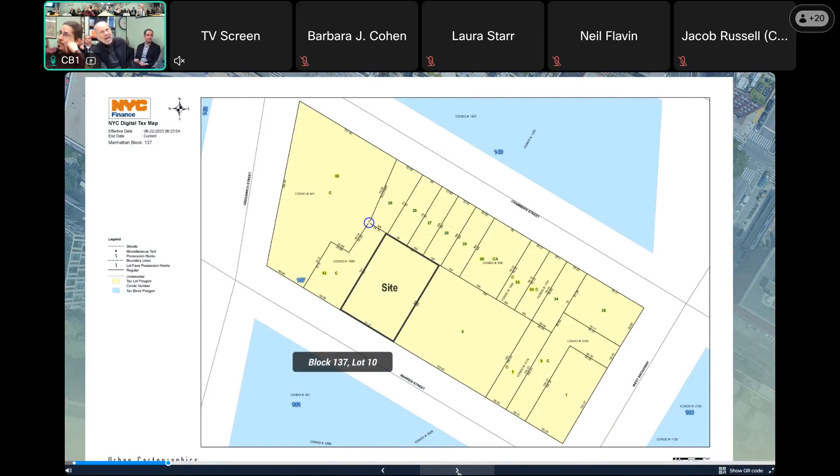The purpose of this presentation is to explain how we got here, the exact conditions that gave rise to practical difficulty in developing the site, and why they could not be foreseen nor avoided, and how a small enlargement to the building's 12th floor, which is the subject of this variance application, is the minimum needed for the hotel to succeed.

Danny, could you turn the volume?

The story begins back in 2019 when the hotel's current owner, Firmdale, began planning the new hotel. The design they and their architects came up with, which was subsequently approved by the Department of Buildings, included a total of 4 cellar levels beneath the building.

These lower floors were intended for mechanical systems, back-of-house functions, and several amenity spaces, such as a fitness center and meeting and function rooms. None of these is superfluous. Indeed, having these amenities is virtually standard among hotels, regardless of scale or brand. The 4 cellar levels comfortably accommodated these essential elements, reserving above-grade space for a lobby, restaurant, and mainly the hotel's guest rooms and residential units.

Soon after excavation began in 2019, the project encountered unusual practical difficulties. The soil and groundwater conditions at 86 Warren were far more unstable than geotechnical investigations suggested, requiring extensive dewatering just to maintain safe excavation. As the application team can explain, the subsurface conditions could not have been predicted with the tools and testing permitted before construction.

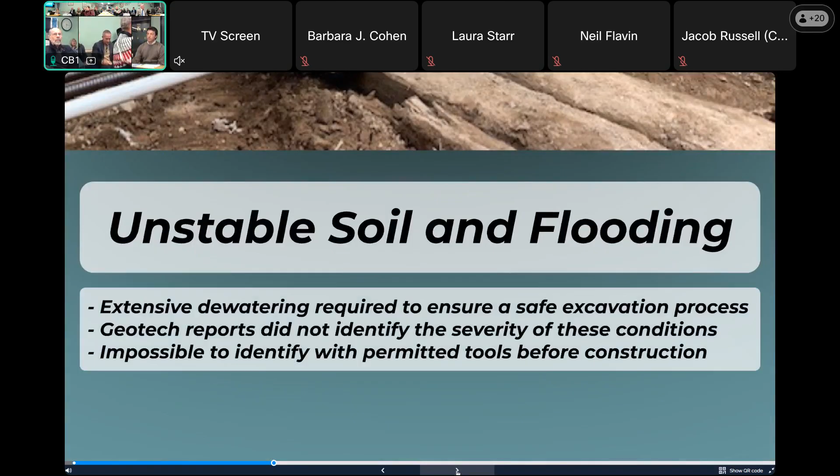The unique soil conditions immediately interacted with an unexpected condition in the adjacent building at 80 Warren Street, which was constructed in 1915. That building's foundation wall, which was assumed to be tied into its floor structure above, was in fact floating, meaning it was not connected to the building. This critical structural flaw, which was impossible to know about ahead of time, made the neighboring building begin to move as drilling for the hotel's secant pile wall foundation began.

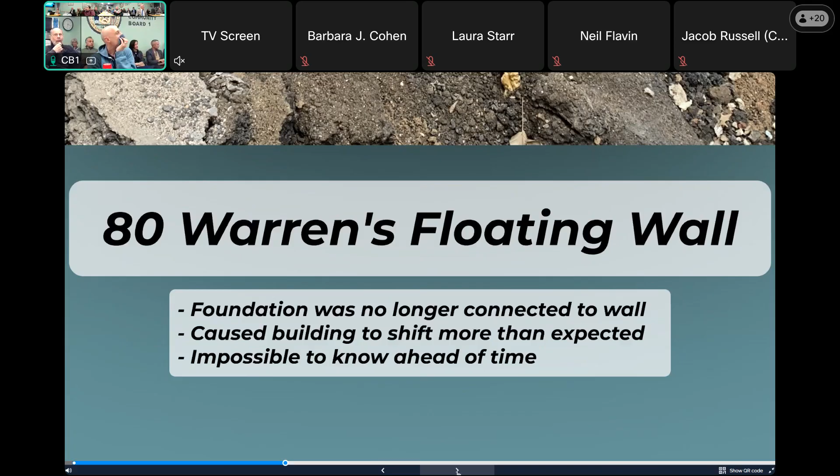For that reason, all manner of precautions were taken, from installing strapping to continuously monitoring the movement of the adjoining building. As drilling and excavation proceeded, this combination of unique soil instability and the unforeseen condition of the adjacent building continued to cause movement in the structure of 80 Warren Street, far exceeding what would be expected in a typical excavation.

Once movement in the neighboring building was detected, the construction at 86 Warren Street was stopped, the cause of the problem investigated, and extensive steps to stabilize nearby buildings completed. These actions were taken out of an abundance of caution, often when the damage being repaired might not have been due to the excavation of the site at all.

In fact, over the course of construction, the team performed nearly $500,000 of repairs to 3 surrounding buildings. At 80 Warren Street, they repaired foundation holes and cracks, installed new tie-ins between the wall and floors on all 6 levels, and completed substantial interior repairs totaling well over $330,000.

At 92 Warren Street, they waterproofed the entire interior wall adjoining the site and repaired terrace finishes, approximately $42,000. At 160 Chambers Street, they repointed the entire rear facade, repaired windowsills, recaulked windows, and installed structural wall straps on every floor, approximately $115,000.

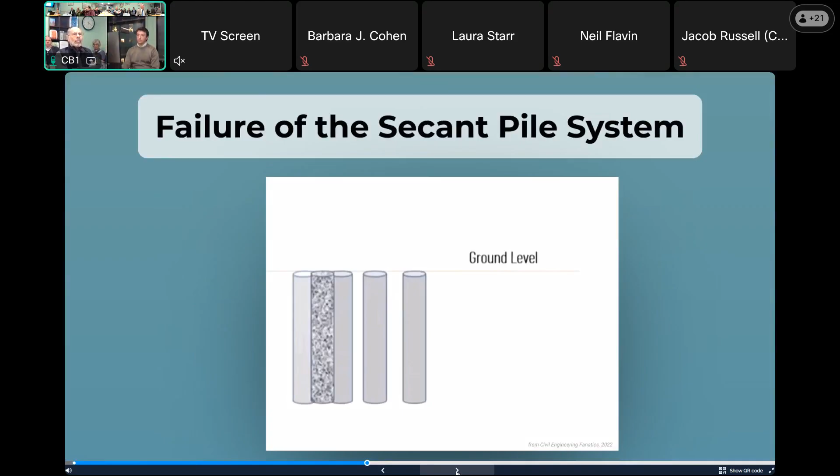To control the unstable soil and protect surrounding buildings as the hotel's several subcellars were being excavated, the project's engineers designed a secant pile system. So, with only about half the secant pile wall completed, the project team made the difficult decision to stop further pile drilling and redesign the building to have just one cellar level.

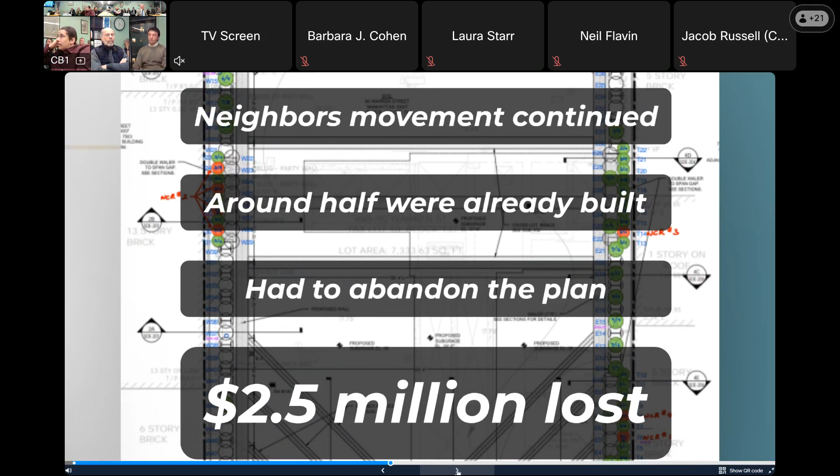At that point, the hotel had already invested over $2.5 million in secant piles that were ultimately abandoned in the ground. Abandoning a foundation system of this scale is extraordinarily rare, and it underscores the uniquely unstable subsurface conditions and the degree to which the site's physical characteristics directly impacted the development of the site. Perhaps more importantly, once they concluded that the secant wall could not be completed, the team was forced to revert to a conventional foundation system.

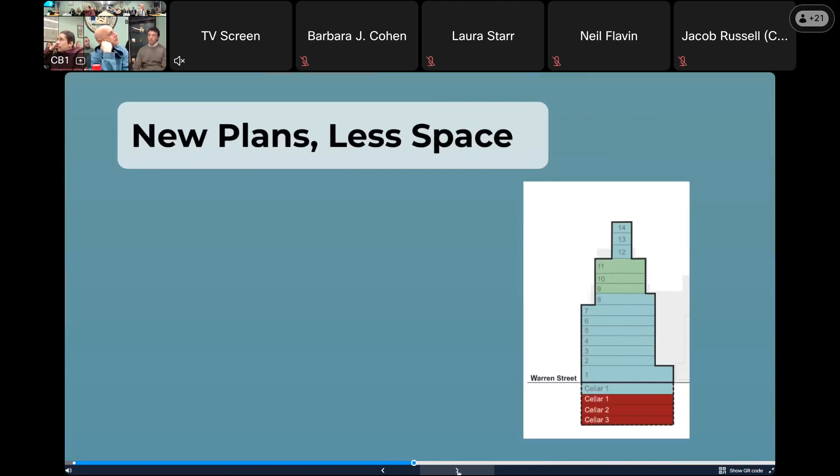Cellar is now filled entirely with mechanical and back-of-house functions, leaving no room for the basic amenities and operational spaces that were originally planned for the 3 subcellar levels. This loss was the direct result of the site's unique physical conditions, unstable soil, challenging groundwater behavior, and the hidden structural condition of the adjacent building, and was in no way self-created.

While these physical issues were unfolding, 2 compounding factors made the situation even worse. First, just as the team encountered all of the problems related to excavating the site, the COVID-19 shutdown halted all non-essential construction, leaving a partially complete foundation and a gaping hole in the ground. Not long after, the city announced new rules requiring a special permit for hotels not already under construction with completed foundations.

Leaving the site unbuilt and seeking a variance at that point would have exposed the neighboring buildings to prolonged risk and could have jeopardized the project's zoning status. While these compounding factors do not form the basis of the variance, they help explain why, in the face of unique and unpredictable site conditions, the building was completed before this application was filed.

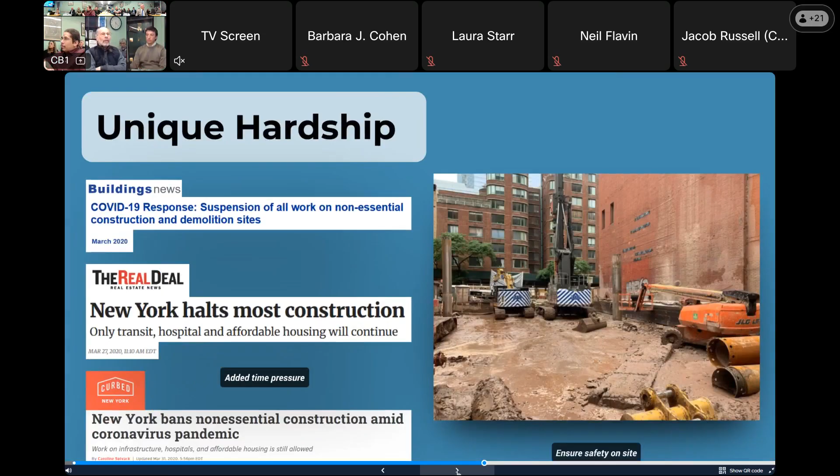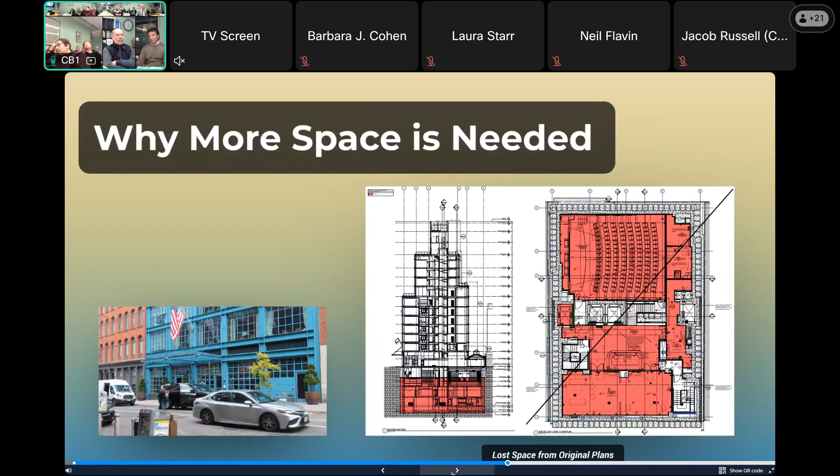Back to the problem of losing all of that subcellar space. Industry experts confirm that without the 3 subcellar levels, the hotel lacks a fitness center and any meeting or function spaces. These amenities are essential for hotels to remain competitive. Without them, hotels' ability to attract guests, generate revenue, and operate sustainably is significantly compromised.

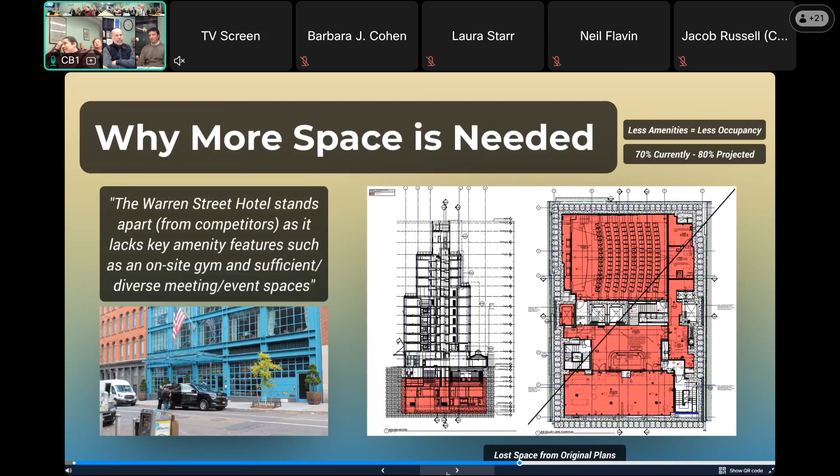Converting guest rooms to make space. To operate at a reasonable level, the hotel simply requires a small amount of additional space, 2,921 square feet to be exact, to replace what was lost. The construction proposed by this application is a minimal single-story enlargement to the hotel's 12th floor, set back from the building's street wall so that it is mostly not visible from the street. This space would contain a small fitness room, a flexible meeting room, and a small zoning-required amenity area.

The enlargement is far smaller than the subcellar space that was lost, does not expand the building's footprint, does not increase the number of guest rooms, and would be nearly invisible from public view. It is the least obtrusive and most practical way to restore essential operational space.

Financial analysis included with this application shows that the hotel, as built today, cannot achieve a reasonable return because of the extraordinary and unforeseeable costs associated with the site's physical conditions and the permanent loss of 3 subcellars. The proposed addition raises the project only slightly above break-even. This demonstrates that the relief requested is the minimum necessary to address the hardship directly caused by the site's unique conditions.

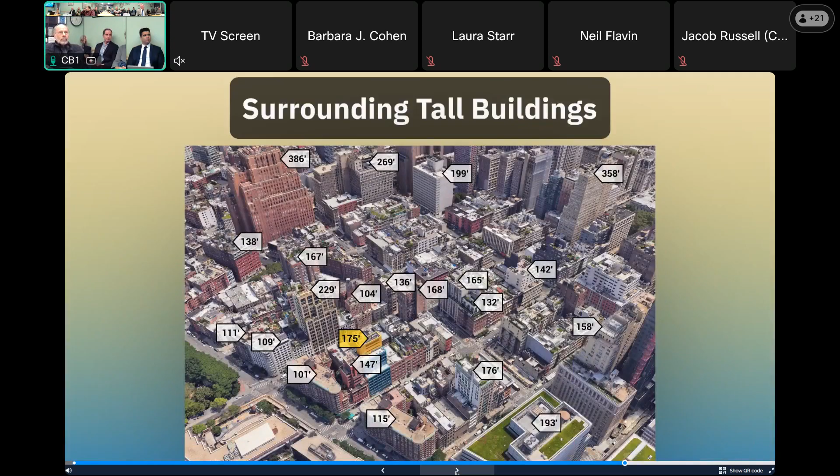Tribeca's buildings come in all shapes and sizes, and many of them are much taller than the Warren Street Hotel. The proposed 12th floor enlargement is small, set back, and consistent with the scale of neighboring buildings. Moreover, it does not actually increase the height of the building and is lower than the existing rooftop bulkhead. In short, it will not alter the appearance of the building from the street, nor will it adversely affect any of the surrounding buildings. It simply restores basic functionality to the building.

The development of the hotel on the site was unavoidably hampered by unique physical conditions, unstable soils, unpredictable groundwater, and a hidden structural deficiency in an adjacent building. These conditions prevented the construction of the 3 approved subcellars and led to millions of dollars in abandoned work and unforeseen repairs to the neighboring buildings. Acting responsibly and in good faith at every step, the development team brought the project safely to completion.

But without the space lost underground, the hotel cannot operate with the basic amenities that virtually all hotels require. The small proposed enlargement restores only what is necessary for the hotel to function fully and competitively. It is consistent with neighborhood character and represents the minimum variance needed to address the hardship created by the site's unique physical conditions.

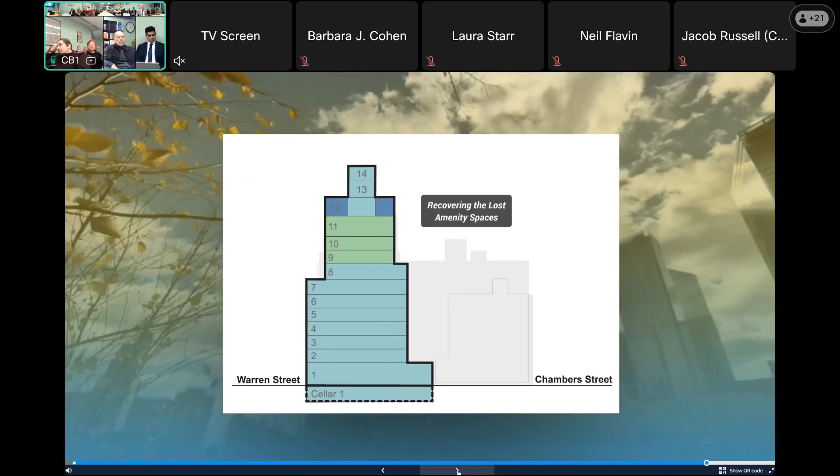But I think it gets the point across to everybody pretty clearly about why we're here this evening. Warren Street Hotel was designed and built to have every single amenity that you expect when you walk into a hotel anywhere in the country or basically anywhere in the world. What you get is an amenity space that includes a workout room and a meeting space, much like a room we're in right now. And I think we've all come to expect those, whether you're in a Hampton Inn or whether you're in a hotel of a higher caliber.

They had no intention of being here. It was not their intention when they started construction to ask for a variance. The amount of square footage that they're here asking for is 2,921 square feet, which is a very minimal amount of space. The amount of height that they're asking for is 14 feet 6 inches. And as we mentioned in our request, it sits right below the existing bulkhead. So it's really just filling in an existing space.

So we'd be happy to answer any further questions that anybody has. And we have our whole team here with us tonight as well. So we thank you very much for considering this. What is the variance for, though? Like height, or setback? Height and floor area, right? Height and floor area are the two things that we're asking for. 2,921 square feet of floor area and 14 feet 6 inches of height.

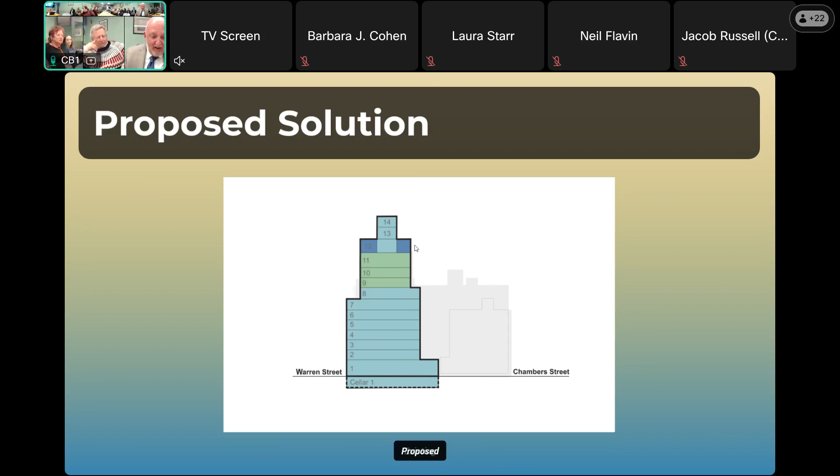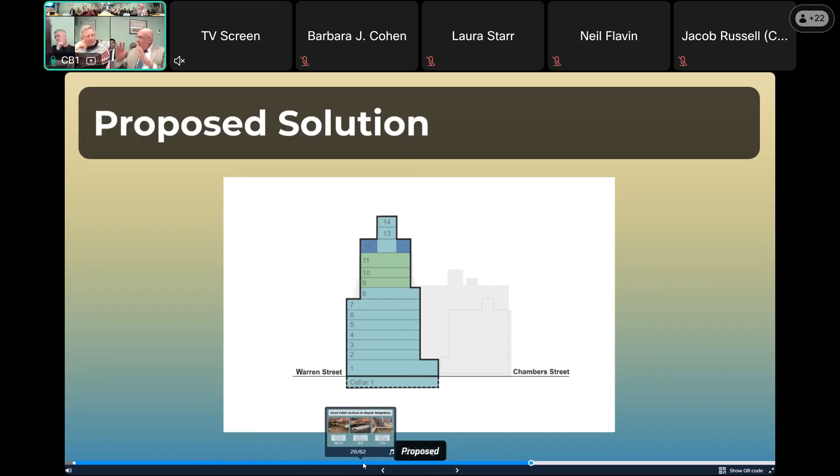2020. So in 2020, we took the gym out. We knew we had to, because once we started digging in the ground, that was when we discovered that the buildings around us were kind of in crummy shape already. They were fragile. And that's when we realized that the foundation system that we had, which is the secant piles, which you can see everywhere, they go down very deep.

So they're building the East River right now, right? The resiliency project, I'm sure you're probably involved in that. If you drive along the FDR Drive, you'll see the secant piles going down right now. They're drilling them. It's common, to your point, this is what people do against the water. They go down very deep and they build a wall around the water. In this case, once we started getting down deep, the buildings around us, which are 120 years old, 100 years old, were in horrible condition.

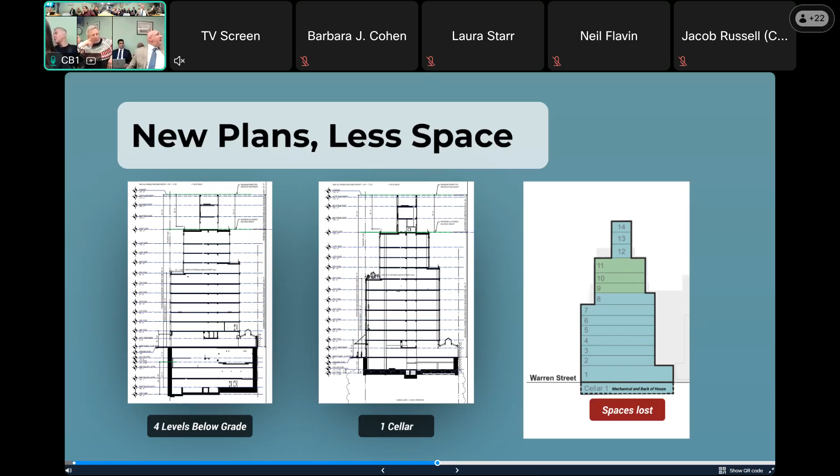You just saw, if you go to the one that has holes. Yeah, that's where you lost me. It's not common to go down 50 feet around buildings with foundations that don't go that low. So I just feel like for me, it undermines the ask. No one ever should have dreamed of going 50 feet lower than any of the foundations. There was no way to identify the buildings.

The buildings had, and I'll let the engineers speak to it if you can. Nidal, if you want to speak to it for a second. First, I think would be probably better, no offense intended for you, sir, but let the engineers versus the attorney talk. Yeah. Right. More truthful.

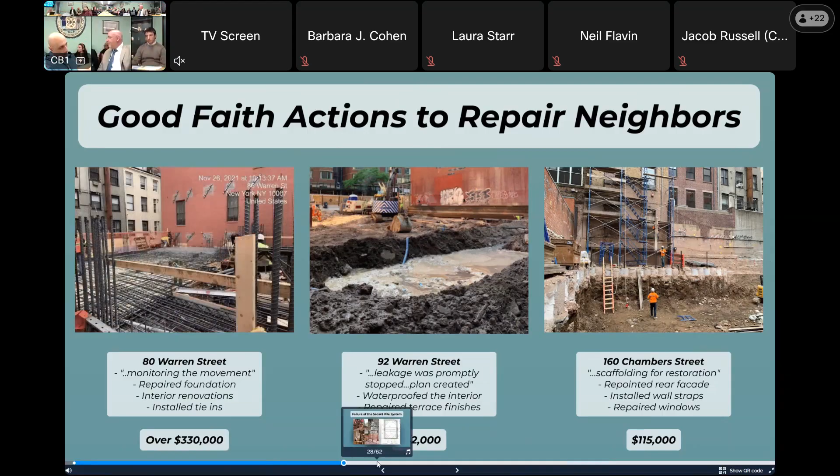Excavation with secant pile walls is very typical, especially when excavations are in the water. What was special about this particular site is, at some point in time, there used to be buildings on what is now 86 Warren Hotel. And when those buildings were demolished, approximately 40 years before this hotel was designed, the process of the demolition did not take into account tying the walls of the building to the joists.

So what was left for an extended period of time, decades, was a free floating wall of the building. That is what was not expected, because walls are usually connected to the floors. Every floor there are connections. And that is something that is not common, to have a wall freestanding. Then when the work started in the excavation and the walls started to show movement, all of the movement, by the way, was within the allowed limits.

So the owners and everyone on the team was paying very close attention to make sure those buildings, if they move, are moving within the allowable tolerances and corrective actions are taken in time. And there were engineers representing all of the neighbors looking at every step of the way. So when the movement started to happen, destructive investigation, which means openings of the interior ceilings inside of the building with the permission of the building, took place, at which point it became clear that the wall and the ceiling and the floors were disconnected.

And that's when an extensive engineering analysis and work was undertaken to tie the building into the wall, talking specifically about 80 Warren or 76 Warren. And that was all happening around this time when COVID just kicked in and the zoning was about to change. I'm sorry, are you a structural engineer or a geotech? I'm the geotech.

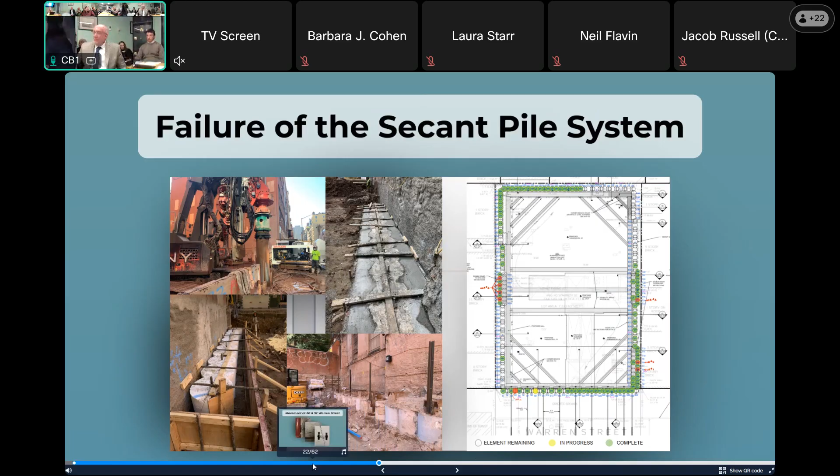So there are 4 of us here from 80 Warren Street. My name is Deborah Treisman. I had the dubious pleasure of living on the ground floor directly adjacent to the construction. It would not have been hard to assess where groundwater was before beginning construction. Our basement flooded during Hurricane Sandy when the groundwater rose. It's well documented. The level of groundwater was very high.

When the construction got started, coming up against the potential lockdown and the loss of the ability to continue construction, Pavarini McGovern sped things up. They skipped doing at least 1 test pit that was on their original plans, which would have shown them whether or not the soil adjacent to our building was stable. They just skipped it. Then they began construction and very quickly things started to shift in the building, cracks in walls, windows broken, doors that wouldn't close.

Do you want me to continue? Okay, there were some intermediate repairs that were done with the idea that full repairs would be done when construction was concluded. Some of those repairs were done in a sloppy way and cracks reopened. The building continued to shift constantly, and we are here almost 1 year post termination of the construction, and there is extensive damage to our building, which has not been repaired.

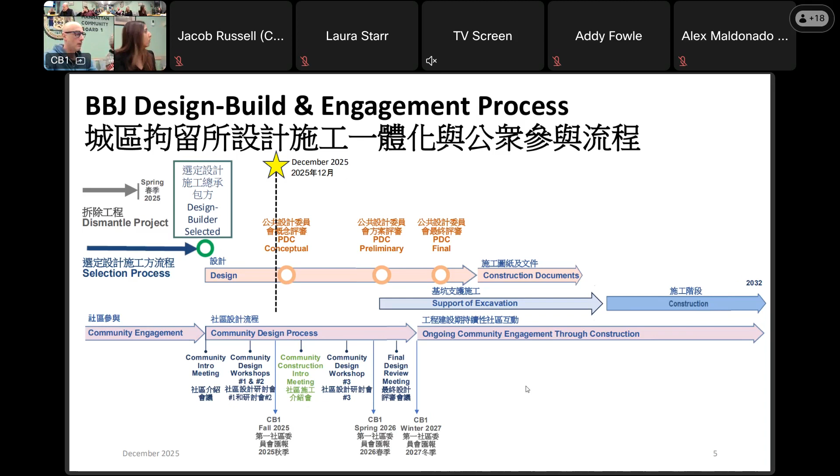We're also undertaking a community construction engagement process. That's going to begin in January of 2026, and we're going to be undertaking that throughout the duration of the design and construction project. So we're going to come back to the community in spring next year, and then likely winter 26, 27 again, with two more community workshops. Next.

So we take the feedback that we're receiving from the community and all various stakeholders very, very seriously. All feedback is documented. We then analyze that through a data-driven process to understand which aspects the community is most interested in. However, we are responding to every comment that the community provides. In the second workshop, we provided handouts with responses to every question the community had in the first workshop. We're going to continue to do that. We're going to come back with those handouts in March.

We've also got some graphs that we're going to share with you that really highlight the community's concern and where input into design needs to be focused. So there is a process for how we're tracking the community's feedback.

Okay, next. So for the Manhattan facility, our design is grounded in the idea of dignity and respect. This is a civic building, and our approach to that is in humanizing the space, bringing in natural light, providing access to programs and education. Next.

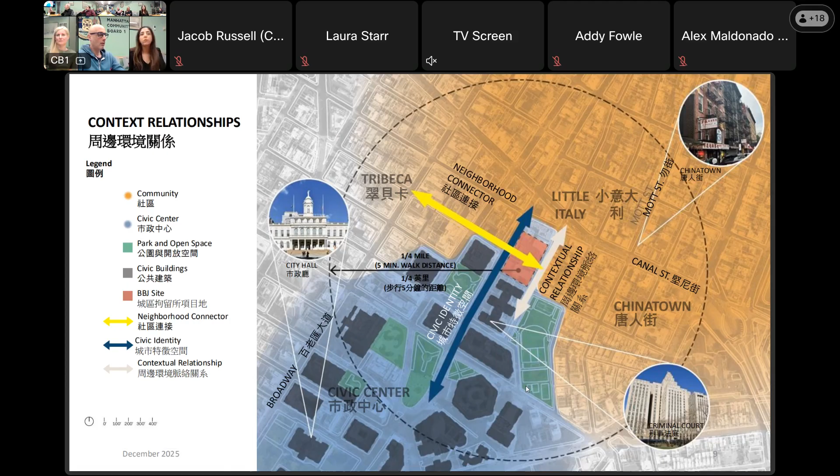A little bit of context about the site. The site is on the northern end of the civic district, so it ties into the identity of the civic district and the other buildings located around Foley Square, including this one. On the north and east, it is surrounded by the neighborhoods of Chinatown, Little Italy, and Tribeca. They're two very distinct neighborhood characters, and the building wants to respond to both of them and create a connection between them. Next.

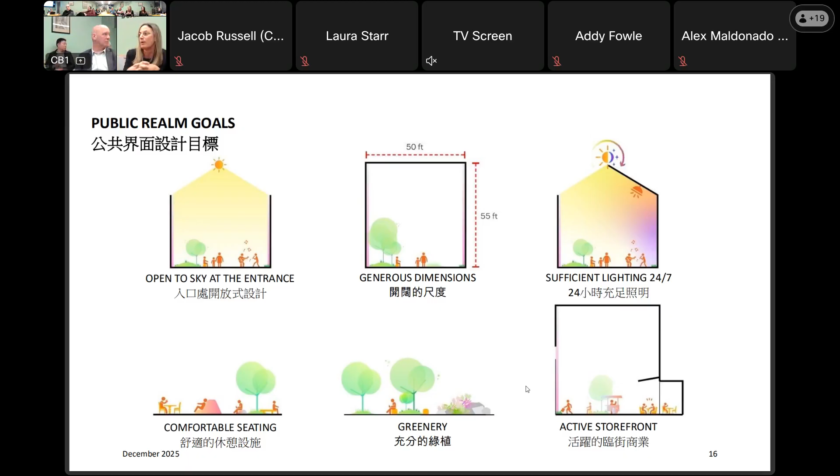So taking all the comments into mind, we are always revisiting our public realm goals and objectives. We are often reiterating this with every step in the process of design. So really trying to enhance as much open space to the sky at the entrance, generous dimensions within the arcade, sufficient lighting. This supplements the concerns about safety and security, comfortable seating wherever appropriate, as much greenery as possible, specifically within the pockets of light that are provided, and then activating the storefront edges within the arcade as much as possible. Again, these all feed into the need to create a safe and welcoming environment that feels easy to walk through while not feeling any kind of threat or danger. Next.

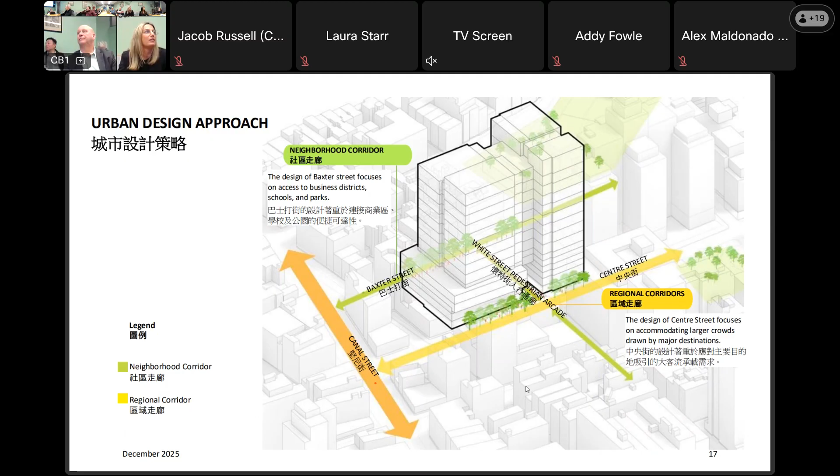Next slide highlights the importance of this connectivity in providing a seamless connection between the two parks, specifically as it creates safer pedestrian crossings, safer pedestrian access through the arcade, and visual connections to the open space across the street. Next.

So part of our design update is refining opportunities for flexible program uses within this spine of landscape planting and amenities. We wanted to maintain clear paths for walkability on the retail frontage side of the arcade, really activating the facade as much as possible, providing clear path widths for ease of movement, and reducing the seating that faces the retail frontage. What we want to do is take the seating and face it towards the program use spaces. So that's reducing seating, but also directing them towards potential uses within the arcade itself.

Some of these program areas include informal opportunities for small performances, centered towards the Baxter Street end of the arcade. You'll see on the diagram on the top right a small gathering space with some tiered seating. This is an opportunity to create vibrant programmatic opportunities connected into Columbus Park and drawing that into the arcade space.

As you move closer into the arcade, we have designated seating for additional gaming tables or social interaction, again taking some of the landscape vernacular from Columbus Park and pulling that further into the arcade. And within the central portion of the arcade where there's not a lot of daylight, we want that to be as flexible as a plaza-like setting for potential activities or program elements that can be used in the future.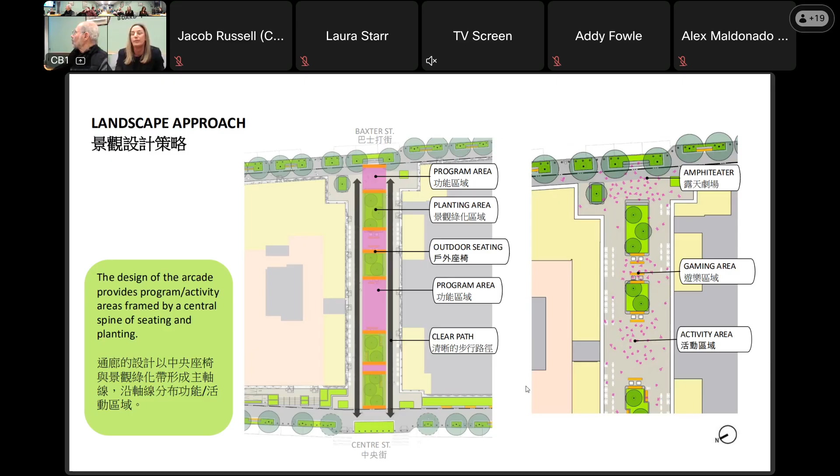Zooming back out, this is how the arcade is nested within the two streetscape designs. Walking through the design from the upper portion of the site clockwise, we have a loading and unloading zone that faces the front of the community or retail space on Baxter. As you turn into the arcade, we're promoting a curb bump out to create a safer pedestrian crossing for those entering Columbus Park, which is on the upper right-hand portion of the site plan. You're greeted with a potential activity zone, and as soon as you walk into the arcade with this spine of planters and seating, you have different programmatic opportunities along that central spine.

Moving further down towards Centre Street, there's a more formal seating arrangement as it interacts with some of the planters, and then a stepped terrace planting that complements the entrance of the building, with abundant streetscape planting along the entire curb face of Centre Street. We're also providing security design that's all implemented into the planters, so it doesn't feel like Bollard City along the entire front of the facility.

We're using reinforced concrete walls that double as site furnishings that are crash rated, so it also acts like a civic amenity, and using bicycle racks as much as possible that complement the adjacent Centre Street bikeway corridor. Next.

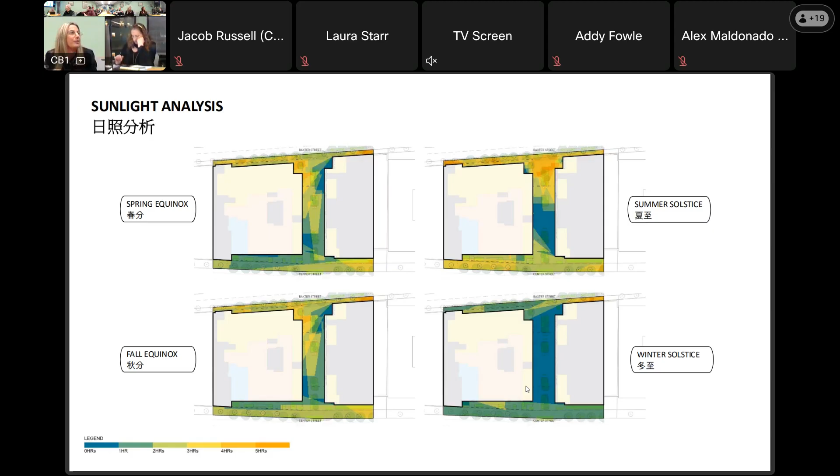To further influence our planting palette, which is still in the early stages of the design project, we're beginning to develop a more robust planting palette approach, but this is just the foundation of our research: studying the seasonal extremes of our site. We are gaining a lot of sunlight during the shoulder seasons, fall and spring, which is great. And winter is the dormant season, so there's little to no daylight during the solstice times. Next.

So again, a conceptual foundation for our landscape planting palette, utilizing full shade species as much as possible in the shadow areas of the daylight analysis, and then closer towards the streetscape where you receive abundant daylight, we are using more flowering species that are full sun tolerant.

Next. Yes, please. Thank you.

Our biggest update since then, which was presented at the last community design workshop, was taking that and inverting the approach of the past, the arcade, where you have this green spine that acts as the kind of central driver for program space on the middle of the arcade, and really using pedestrian movement as a way to activate the facade. This also captures a lot of the available daylight for planting strategies. Next.

So some of our updates and design responses we've numbered on the right. Just to call out some of our bigger updates is really about the planter walls, having seating that's focused on the central spine of the arcade, and then reducing the long runs of seating along those edges, so really maintaining movability or walkability. And then also providing flexible spaces for programming in between each of those planters. Next.

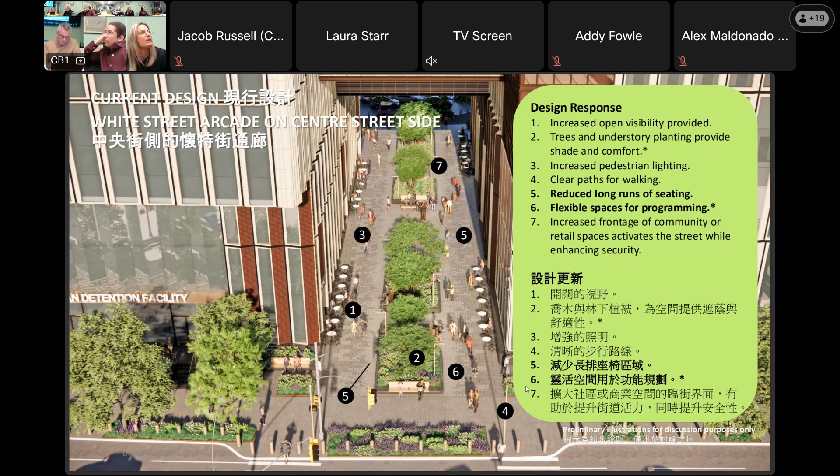Just give me one sec.

Great. Okay, so this is walking further down. We're still on Centre Street here, but we're looking in towards the arcade. You can see some of the planters spilling out into the public right of way, where you have benches that are facing inwards, and the planters that are raised to capture as much planting in the available sunlit areas of the arcade. Thanks.

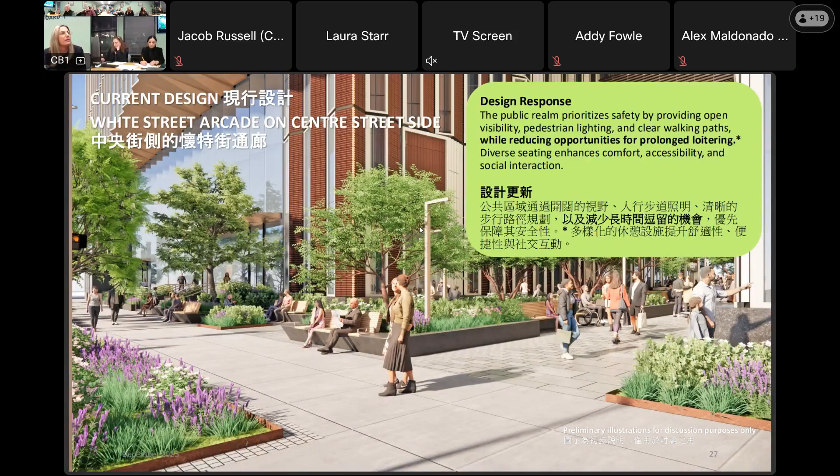So this is in the arcade looking towards Baxter Street. Overall a different look and feel as we're facing towards Baxter Street than towards Centre. You're really beginning to see more of the programmatic activity happening within the spine, highlighting some of these activities, which is the game board tables that are in between the planters, and the updated seat wall design, which is now just a skinny planter wall along the edge.

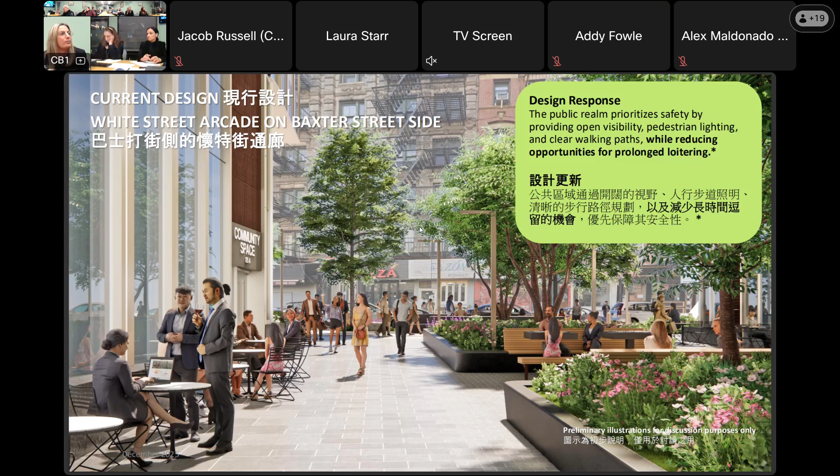Again, this is earlier in the design, so we'll begin to show features, skate deterrents, that level of detail as we progress the design. This is at the end of the arcade where it bookends at Baxter. Really opening up the space and using this as an informal public stage setting where people can gather and watch small performances. This was a request from the community itself, where we wanted to pull some of that vibrant activity from Columbus Park and have an opportunity to activate the beginning of the arcade as it fronts Baxter Street. Next.

And this is a new view along Baxter Street, showing this look and feel. Again, it's a smaller sidewalk, so we wanted to think about the sense of scale here, providing as much planting as possible, but also being cognizant of the amount of pedestrian use that will happen along Baxter Street. So really thinking about the positioning of a loading area to allow for ease of movement for people to cross from Baxter Street onto the sidewalk.

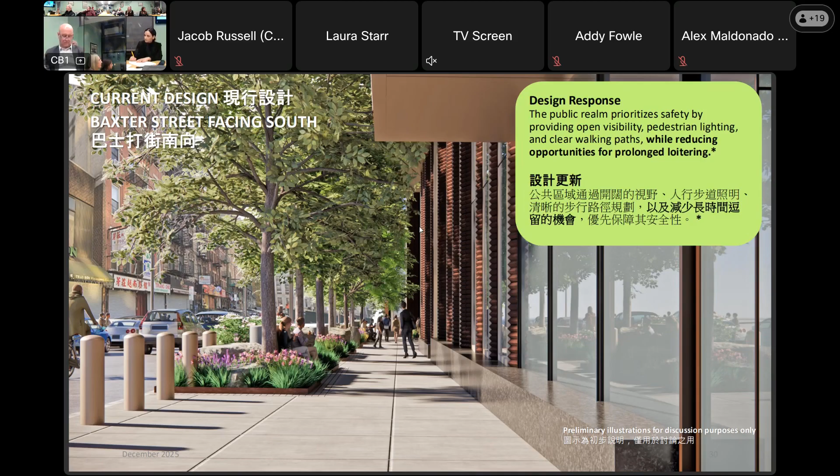And back to Amat. As we come out to the architecture and the exterior design of the building, we heard from the community about the neighborhood context and how the building fits into that, the impact of massing on shadows around the building, the materiality of the context and how we respond to that. There were some requests for additional visuals, including showing different times and seasons, which we've got, and you also saw through the public realm the before and afters to understand where the design was and how it has progressed. So if we go to the next slide.

The key takeaways are summarized here: the neighborhood's identity being reflected through the design, demonstrating the shadows and particularly their impact on Columbus Park, the materiality of the building to avoid excessive use of glass and match the civic buildings and the neighborhood buildings, particularly the vibrant colors of Chinatown, integrating the community and retail spaces into the neighborhood, and then the visuals that I just talked about. So next.

We are responding to that. We will illustrate through the renderings how we have studied in detail both the civic context and the neighborhood context and how the design is responding to that. We've got some additional views and shadow studies.

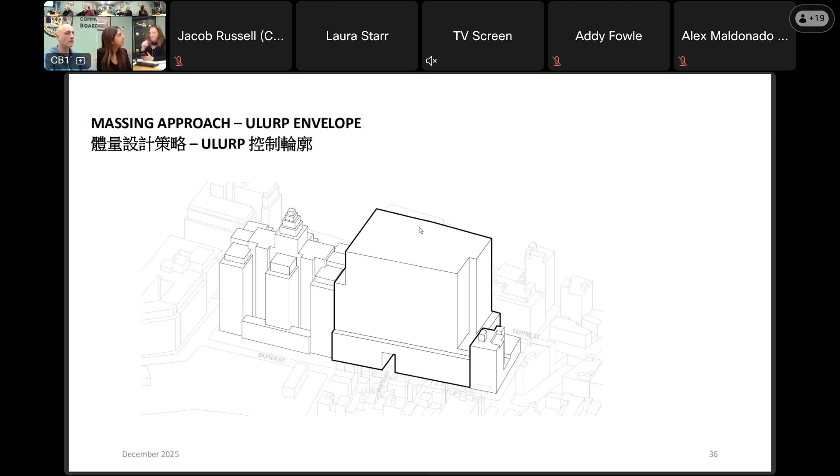So we start by looking at the permitted ULURP envelope that was approved in 2019. Next. Our central approach is to take the White Street Arcade, which is in fact a New York City street west of the site. ULURP requires White Street to be 35 feet, but we feel very strongly that it needs to be much wider than that. So we have widened it to 55 feet, 50 feet, and registered it vertically up through the building. Next.

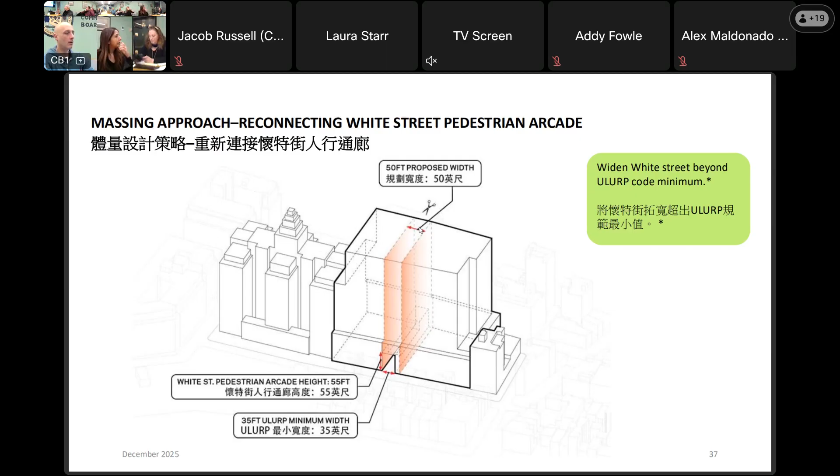Using a similar strategy on the northwest side enables us to essentially divide the building into 4 quadrants. Once we do that, we're able to then lower and calibrate the height of the building down towards the lower buildings on the north and the east side. So we're tallest on the south side next to the courthouse. We are lower than the courthouse, approximately about 17 feet lower than the tallest point of the courthouse.

Above White Street Passage is the lowest part of the building, so we really distinguish the north and the south aspects into separate building forms to break the scale of the mass down. And then to the northeast are the lower parts of the building, which step down 30 feet from the tallest part. Next. Can you explain though how much taller you are than the building north and south of you? That's a measurement I don't understand when looking at it. So where your number 3 is.

So what we're calling out as number 3 is the datum, which is the tallest part of the courthouse. That tiny little spire? Yeah, so that's 17 feet taller than our tallest part. So we're minus 17 feet from that, which is 295 plus 40. And about the smaller buildings that are in the foreground, and Chung Pak, how much taller are you than Chung Pak? We're significantly taller than Chung Pak. I don't have the elevation measure from the same average curb level off the top of my head, but significantly taller.

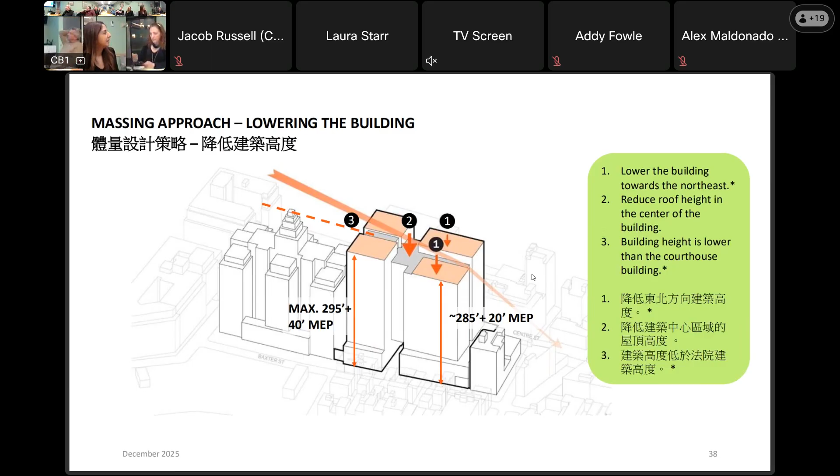We are on the lower part of the project at the podium scale of the project, again, responding to the scale of the neighborhood. The buildings across the street of Chinatown or across Baxter Street are essentially registering the height of the lower part of the volume. So when you're walking on the street, that's the street experience that predominantly dominates. The upper part of the building sets back off that street. We're also registering the podium of the courthouse and the horizontal datums that come across that. So through all of these various strategies, we're knitting it in various ways back into the context and the neighborhood. Next.

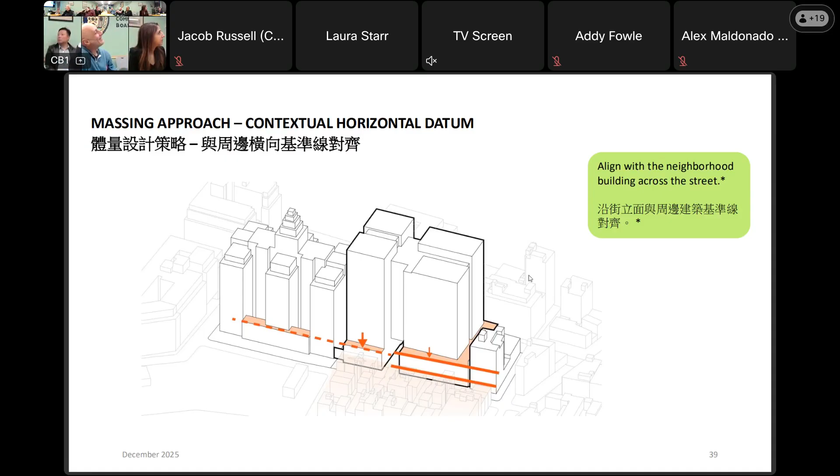And in terms of when we carve the vertical registry of White Street vertically up through the building, breaking it into the 4 quadrants, that essentially is a strategy that the courthouse started with the 3 volumes that the courthouse expresses. So continuing that same idea of a vertical volume, a void and vertical volume just reinforces that sense of verticality and civic rhythm along the street experience.

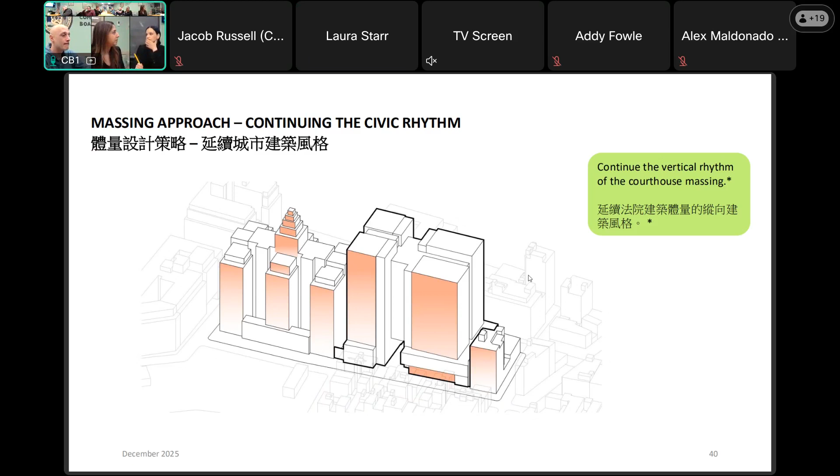About the chunks you haven't highlighted. So that's the same as the recess within the courthouse as well. Right, so the reason why the courthouse appears vertical and tall is because you've got these projecting volumes that are closer to the street. And then the volume behind that, which we've also not highlighted in the court, sets back. So White Street is the same strategy, the volume sets back, so your perception along the street and the civic rhythm is very similar in its strategy to the courthouse. Okay, next.

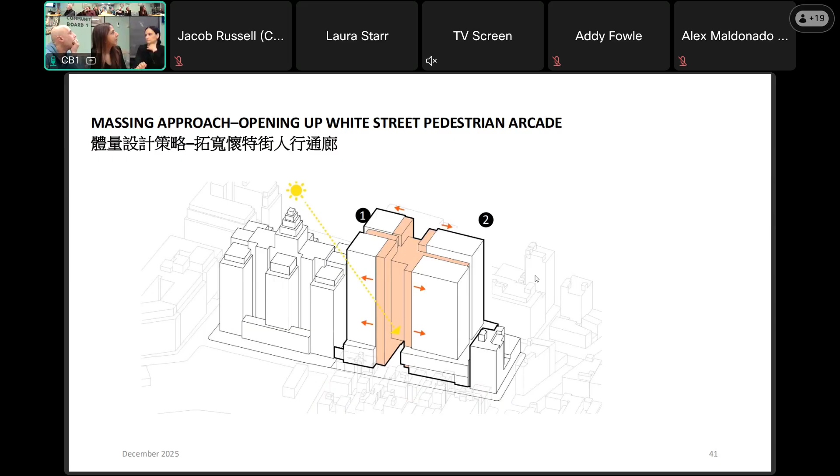And in setting back that White Street volume, it allows us to bring daylight into a White Street arcade, which is what enables a whole host of the planting that Autumn just talked about. Next. And on the left-hand side, you're looking at a plan from the roof level. So greater than 50% of White Street is open to the sky. What you're seeing in gray is the only overhead part. All the white is in fact open to sky. And on the right-hand side, the section illustrates the scale of experience in White Street and the daylight penetration. Later on, we've got some renderings that actually show you the daylight coming into White Street. Next.

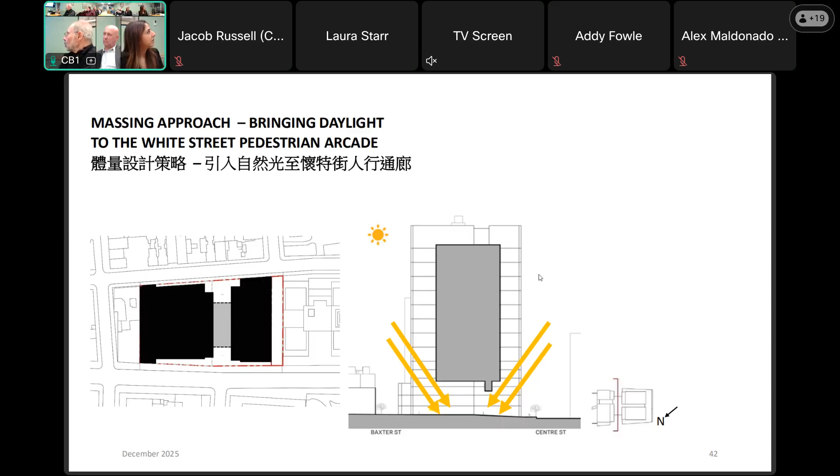And in talking to the exterior design and materiality of the building, it's looking at studying the civic context, the sense of volume that the civic buildings express, the vertical expression they have, not just of the columns, but also how they combine the windows to express the verticality of the opaque versus the open aspects. Next.

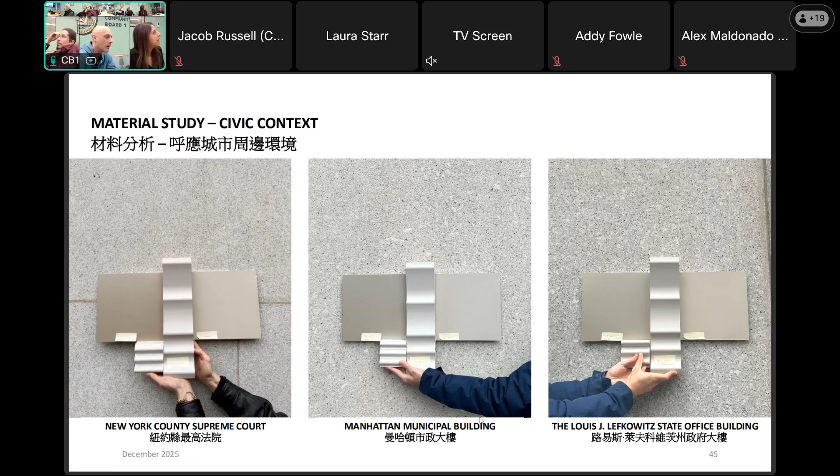And then similarly for the neighborhood, we've studied the sense of what is the proportion of the building, the 20-foot, 30-foot rhythm of the tenement buildings that repeats itself, the rhythm of the fenestration, the scale of the fenestration, the fact that it's got 3-dimensionality, there's a lot of sculptural quality to it, the ground floor retail, the horizontal awning, and the material and vibrant colors of Chinatown and how we replicate that.

So next. So just in terms of materiality, we did the same thing. We narrowed down a palette of materials and colors. We went to the site to various buildings within Chinatown, compared them, to start to build a story and palette that will work with the Chinatown buildings. Next.

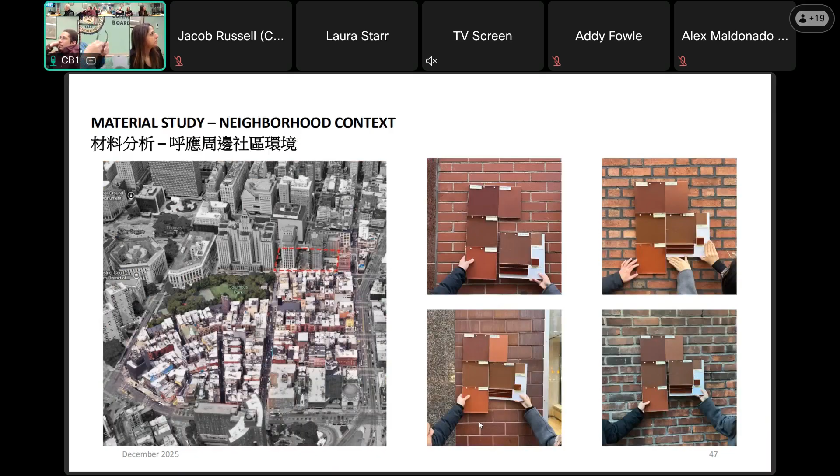We heard from the community, they wanted a lot of warm materiality. So those are the elements that we are incorporating within the building here. Next.

Of course, we've changed the materiality very significantly. There was a whole host of comments in the peer review about materiality, and as you saw, we're very carefully calibrating it to both the civic and neighborhood context. The lower part of the project responds to the neighborhood context, which is your street level experience, which is really where you will experience the buildings the most. The upper part is part of the civic district building and its civic nature.

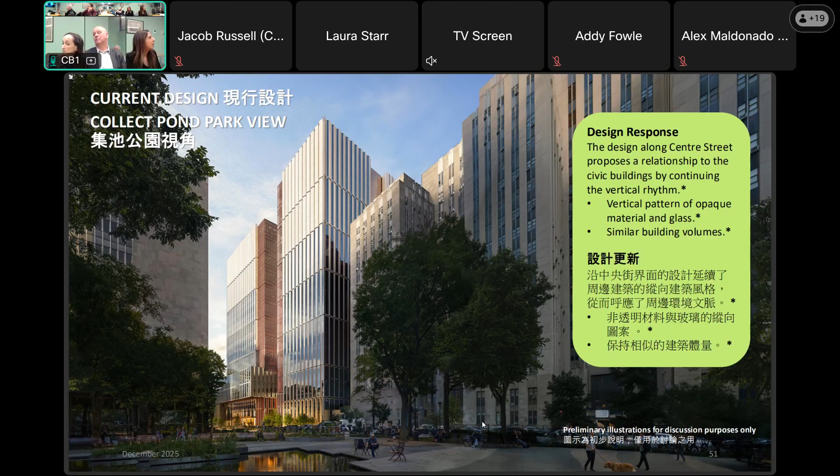So here's a view. We're still on Centre Street. We're now standing in Collect Pond a little bit further back. There were some questions in the peer review as well, talking about how you would relate to the courthouse, and we talked about the vertical rhythm. So you're seeing the vertical volumes of the courthouse on the right-hand side, and those vertical volumes are being expressed similarly through our building as well. So carrying that language in the volume, but also the vertical banding of the windows in the courthouse, and a very similar expression of how that works as a modern interpretation for the Manhattan facility. Next.

So it's really important what Autumn talked about, the clear paths of walking next to the retail. It's really making this a successful New York City street, how a typical New York City street works. You have retail right next to the sidewalk. That's really the experience that continues through the site. Next.

The street experience, however, is scaled down to the podium levels, which come out to the street level itself. The taller part of the building does step back, so it does have that sense of breaking the scale down as it comes down to the street itself.

So here, again, the sense of bringing that materiality, the warm material, the scale, the texture down to the street level, balancing the idea of how much of the retail do you see. So it activates the street, but you still get sufficient amount of the material that feels like brick coming down.

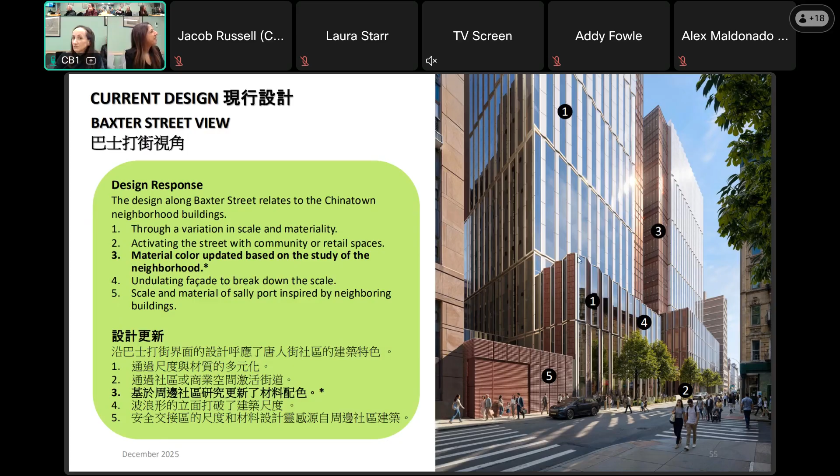The jail? That's Laura Starr. Presenting the jail. Sorry, yep. Laura, you're on mute. I gotcha. She's having dinner. Yeah, never mind, I muted her. Sorry about that. Next. My goodness.

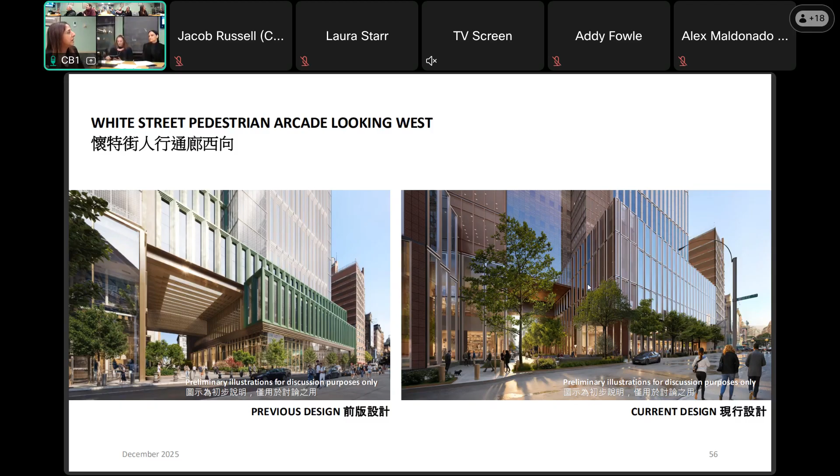So just a closer look at that, and then the notion that the street is activated with community and retail spaces, so it ties the street experience into the neighborhood. Next.

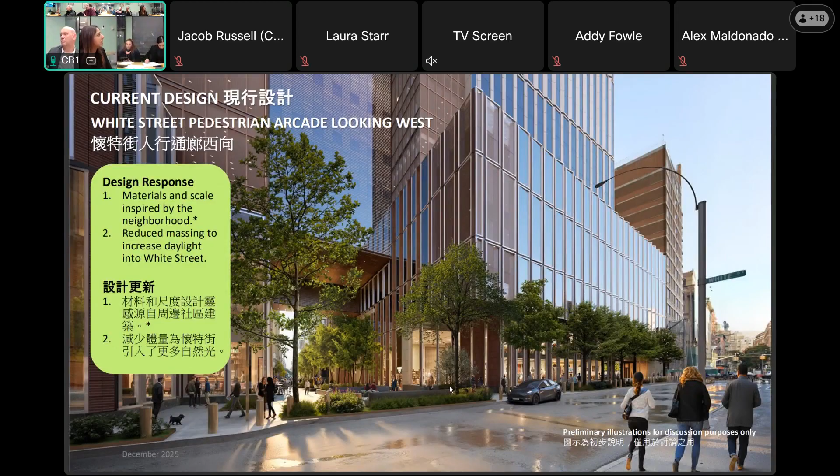A view through White Street Arcade. What was presented in our proposal on the left-hand side had quite a lot of glass with the idea of making that retail. We heard from the community that they wanted a lot less glass and incorporation of the warm material, so we've moved in a very different direction in the design that you see on the right-hand side. Next.

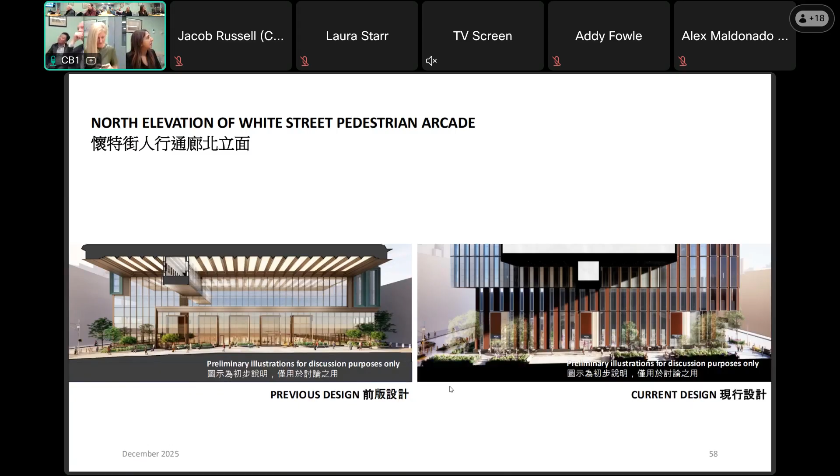That also starts to include the sense of portals for and entrances to the retail and the community space, so there's clear wayfinding and signage associated. Next.

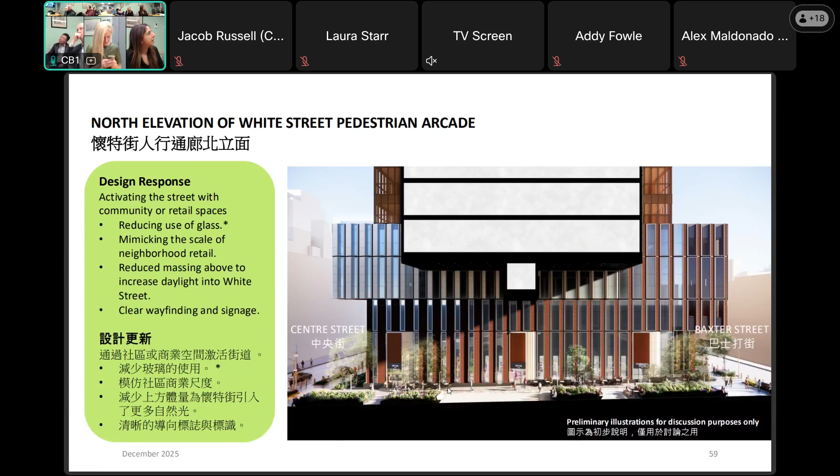And then a view of White Street Passage from Baxter Street, and we're looking towards Centre Street here, starting to pull together all of the elements of the architecture and the public realm and landscape that we've seen previously. Right, next.

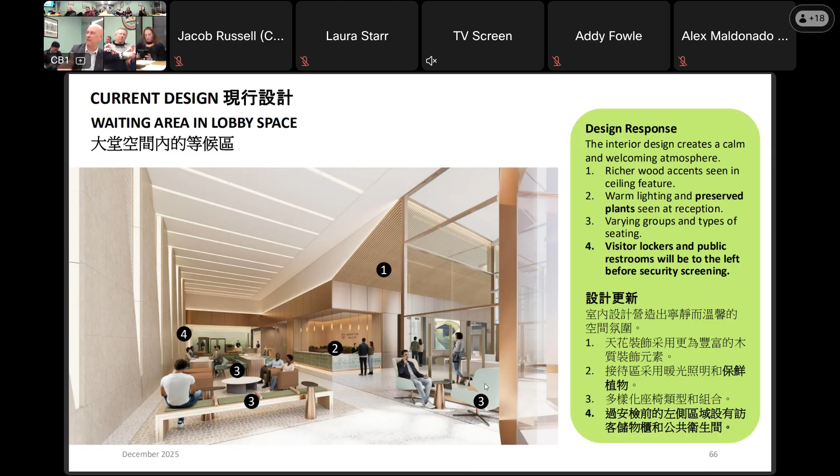As I mentioned before, there's other types of visiting. So there's also a non-contact visitation where there's security glass between the people in custody and others that are coming to visit them, but it doesn't stop the idea of bringing in the daylight, the warm materials, and having those same types of themes throughout this area, to, again, enhance the internal part and really have daylight in every element of the facility that we can.

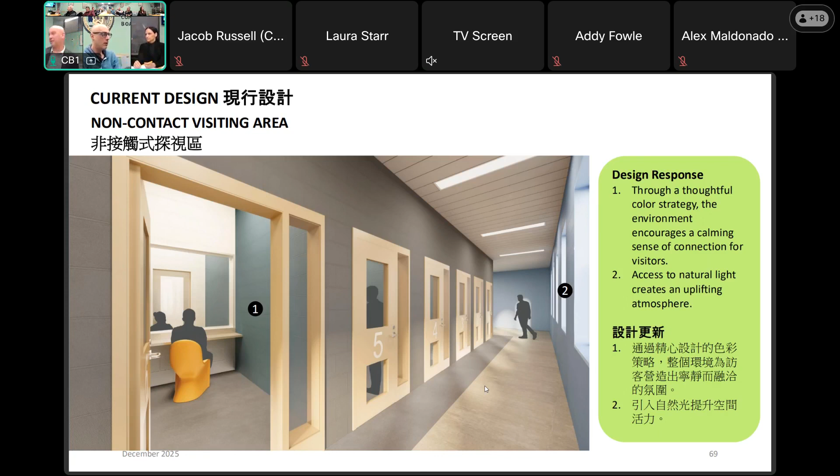So again, we are populating that. Perhaps we're not showing as much light as would come in from the right. When the door is shut, it has, I shouldn't say full, but quite a bit of glazing in the door and the side light, and also daylight coming from the other side as well. So given security concerns, we're bringing in as much daylight as we can.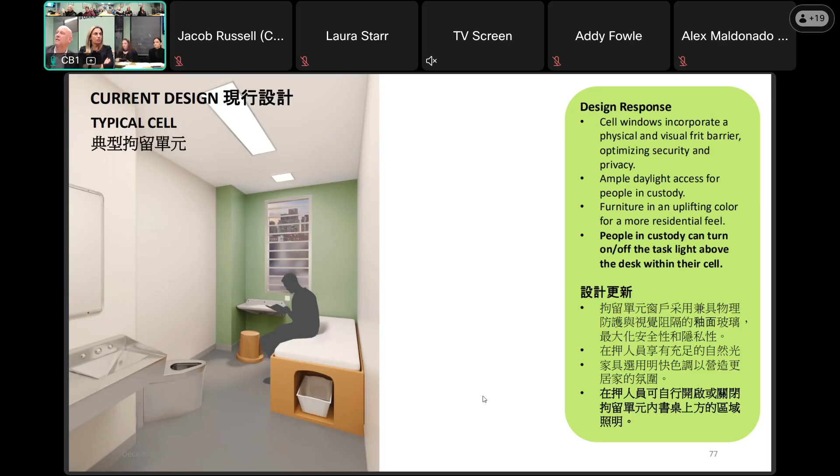So the last thing I'll just leave you with is that there are many elements that the city, the mayor's office, Department of Correction conveyed to us that they wanted to include in this design. We use this check all the time as we're developing the design to make sure we're continuing to meet these values, to continue to make sure that we're hitting these marks as we progress the design further. Thank you.

Thank you, Joe. So I'm gonna stop sharing, unless somebody asks to go to a slide. Right. Go ahead, Jason. What are we here to weigh in on? Like, really? Just general design.

Okay. Not to get too into the design, because I really don't want to, but do you notice how your street level has a more horizontal rhythm somehow, and the above street level has really a very vertical rhythm to it that kind of makes Tammy's feeling that the building is much taller than the buildings around it. You know, it's missing a band or something, some way to not make it going up to the sky. Because the rhythm in the neighborhood, there's always horizontal.

If it's a postmodern building, you see the slab sticking out, and then the brick. If it's a tenement building, there is a real rhythm to the windows that makes a more horizontal thing because it's punched opening. So, yeah, and I will also agree though that the building to the left does emphasize a certain horizontality because of it being a skyscraper type building and a deco building. But even that building does have in between its horizontals a more pronounced, deeper horizontal band under each window. Each window is broken up into double hung windows. So for me, your measure of that is two stacked up vertically.

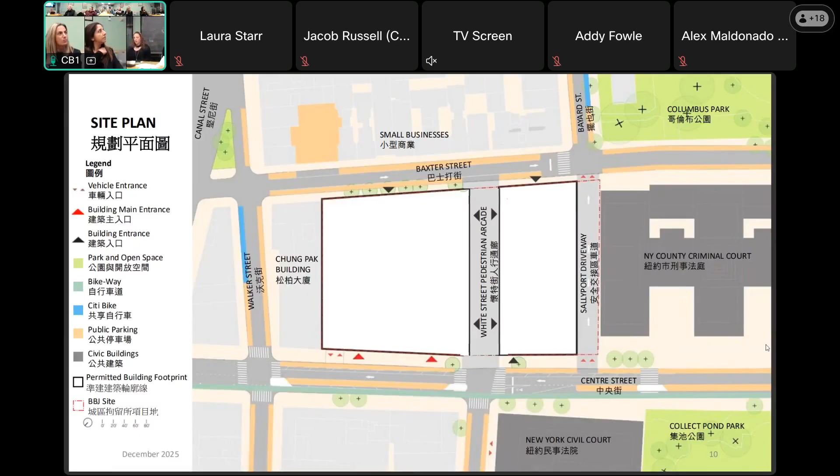Conversations have been had about adding a bike lane on Walker, closing Walker completely from Baxter to Canal, and then pushing any of the commercial parking needs onto the side streets. That poses a significant concern: you're telling them what you're doing, they're coming to us with a different plan, and there does not seem to be, from the community's perspective, overlap for understanding, because now this is the next slide that you showed us, which was public space connections.

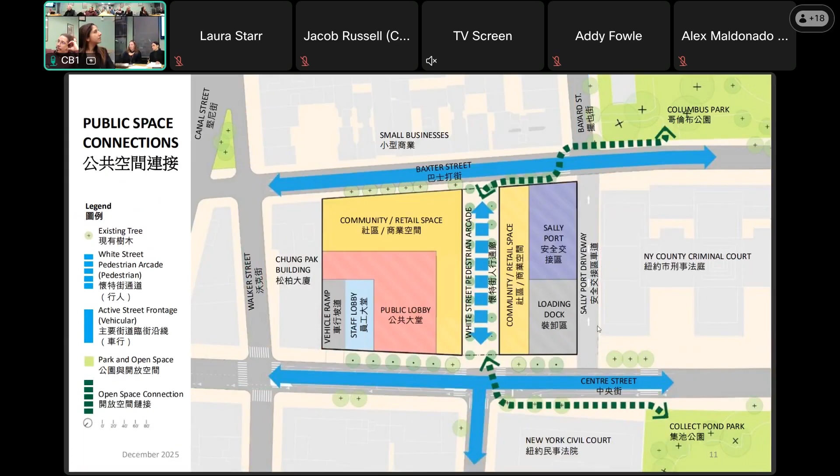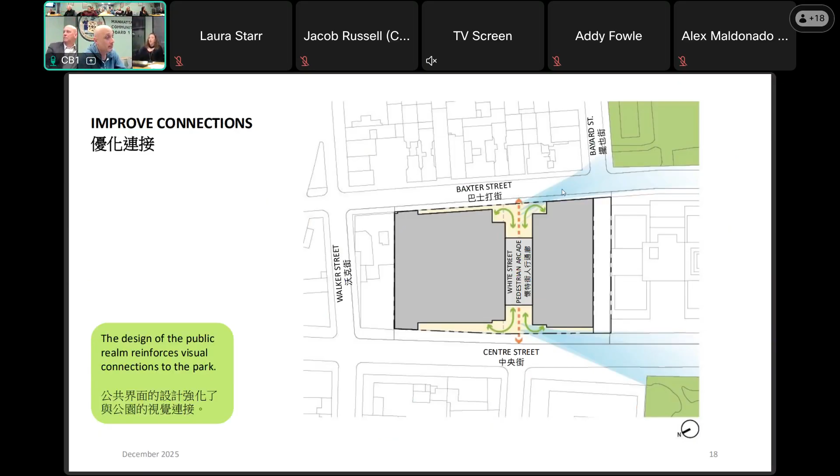And again, that would have to be different, right? And then you said it's the, I'll find the other one, this one? Keep going, sorry. That does not have a curb bump out or any accurate representation. This one shows the top of Baxter, but it doesn't help understand how tight that street is and what would happen to the public parking on the other side or this side of the street. So I don't see anything on here.

So here, that's probably getting more. But what is the zoomed out view? What is load-in? If DOT is proposing to remove all of the commercial parking on Canal Street and push it all into the side streets, there are several restaurants; Baxter is a very restaurant-heavy street that has had roadway dining.

Point's very well taken. As Autumn said, the team has started the conversation with DOT. DOT is reviewing these plans as they progress, and we will absolutely continue the conversation. We'll follow up with them about some of these specific items, Tammy. Yeah, I'm considerably frustrated because they came to us presenting plans, said they were talking to you. None of this was mentioned in their plans, and they were here a week ago. Okay, we'll follow up with them.

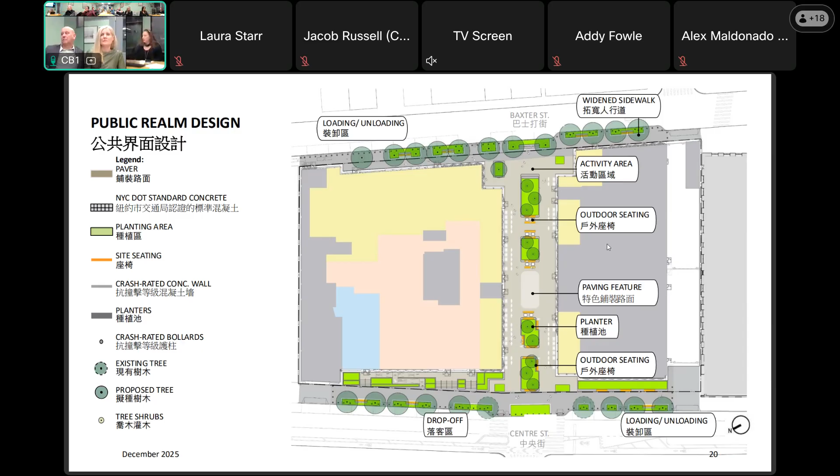Okay. I just wanted to clarify. When you mentioned the symmetry with matching into Chinatown, in the profile where you're doing that on the bottom part of the building, does that extend all the way back on Baxter from every part of the building on Baxter? I'm sorry, I don't follow your question. The lower part of Baxter, you said you were making it contextual to Chinatown.

Yes. The original drawings did not have that contextuality through the entire length of Baxter. As it came closer to the courthouse, the materiality on the lower levels changed. That is not the case anymore. The materiality that matches Chinatown is the entire length of Baxter, from the edge of the courthouse, including the Sally Port gates, all the way to the Chung Pak party wall. Thank you.

And then I love your pictures of Collect Pond. The drawings are beautiful. Is BBJ putting money into fixing Collect Pond so it actually looks like that? Because Collect Pond has not had water for at least five years that I can remember, and it's broken beyond repair. So if BBJ is talking about enhancing the beauty and the light, is DDC planning on fixing Collect Pond? Collect Pond Park is outside the scope of the BBJ program, but we will absolutely share these comments with our city partners.

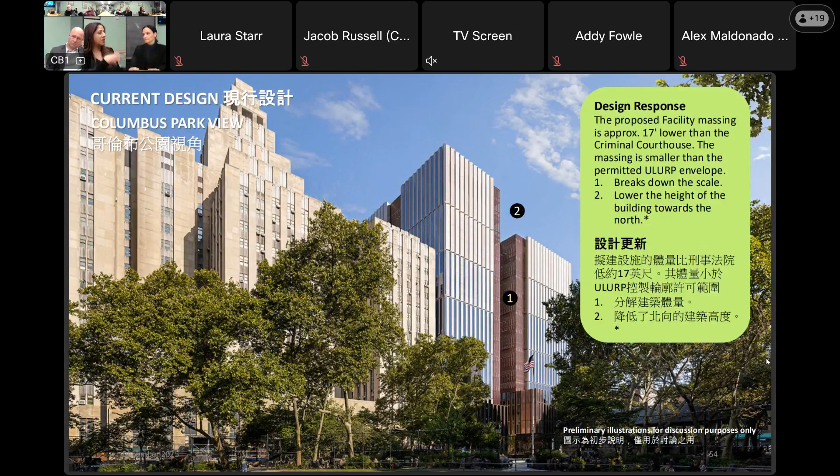Which I'm sure is a very sophisticated system, but the program that goes inside doesn't have any access to direct light, right? It does. Most of the program that you're seeing in here is cells behind every window. So there's a very careful calibration of how much daylight, how much solar comfort, how much glare comfort is in each of the cells. So those windows, they're not registering on the exterior of the building, right?

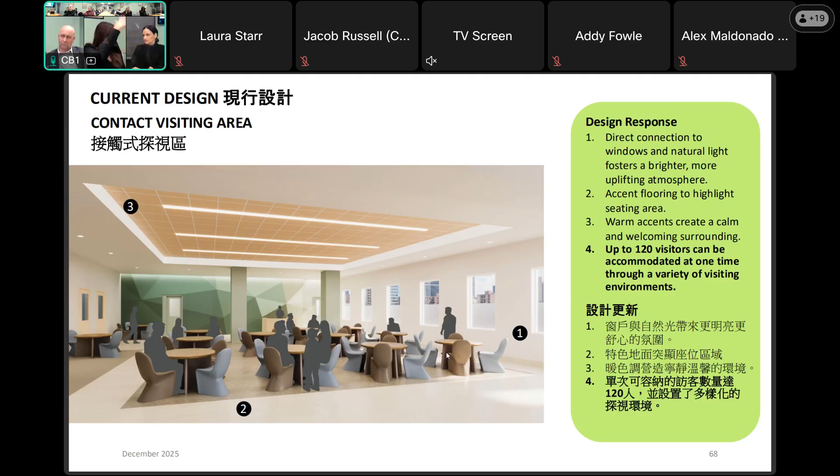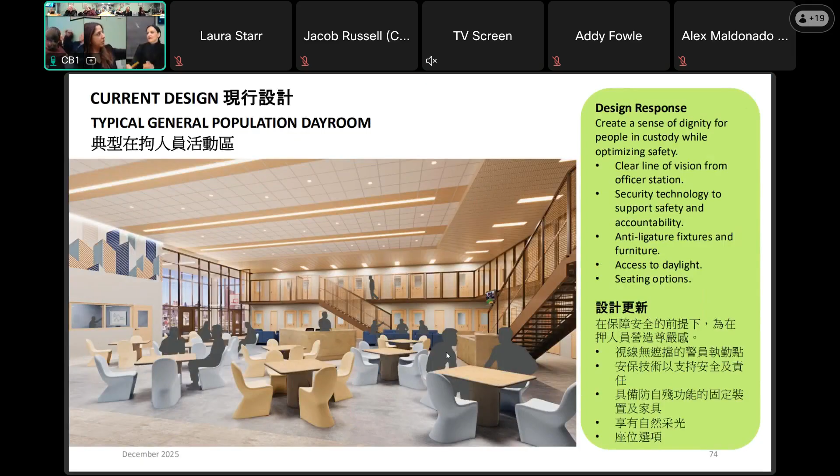No, that's exactly it. What you see as the solid between the glazing is the solid part that you're seeing externally. Vertically, where you've got the window, you've got vision glaze, and below that, spandrel glazing, which is basically opaque glass, which is what is making you think that this looks so punched, and it doesn't look punched on the exterior. In this one, you're not looking at the windows, the windows are behind the cells. Got it, okay.

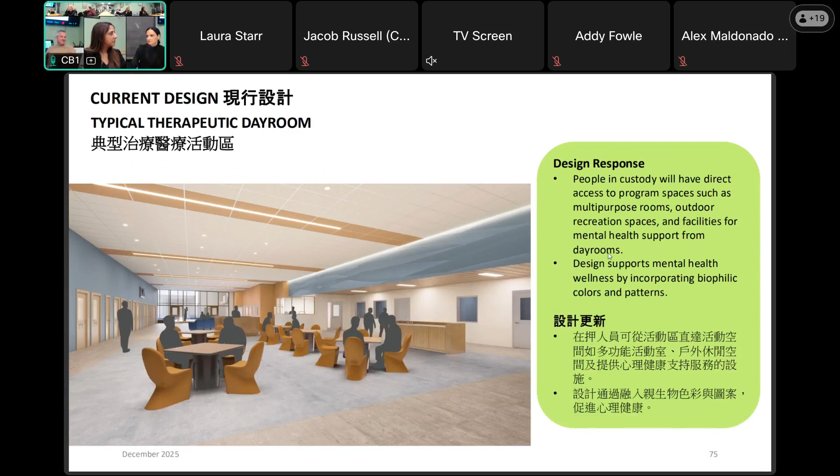And there are no issues with the outdoor spaces being on the perimeter of the building, exposed to streets and public? As Jeff said, there's 2 layers of screening. On the left-hand side, you're seeing the 2 layers. On the inside is the secure perimeter, the detention mesh. On the exterior is the visual screening. Combined, these 2 perform a whole host of functions.

Anti-ligature, anti-climb, privacy screening. The exterior mesh actually is a little bit three-dimensional. And they can't throw things out? There is 1.5 feet of space between the two meshes. That space is accessible; there are access panels so it can be cleaned. So there is a fair bit of deterrent there. Got it. And most of these outdoor spaces start higher up in the building. It's not close to street level.

There was a jail when I was living in LA where you couldn't walk on the sidewalk because they would maybe throw their drinks on you. Familiar with it, yeah, I know which one you mean.

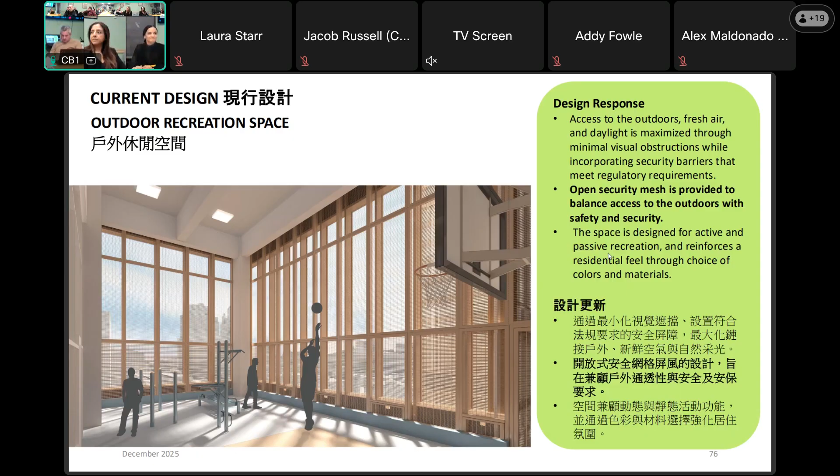I have a question. The jail is directly facing 90 Lafayette Street, which is a single-man homeless shelter that houses over 150 beds every night. It is a traditional homeless shelter where people usually get pushed out during the day. You mentioned that the design is trying to stop loitering in the area. However, in your updated slides, I don't see much difference in the benches from your previous design, because they're still long benches. I see people can still sleep on them.

We don't want the neighborhood to become Sara D. Roosevelt Park, because that is surrounded by homeless shelters, and the crime problem is already out of control. That's the first concern I have. The second concern is that during the second design workshop, we requested DDC try to gate the arcade, because we see the arcade becoming a potential attraction for loitering during the evening and night. Another thing we brought up during the workshop was who is going to manage those planters? These are beautiful trees, like your drawings, they're all beautiful. Who's going to manage that?

I used to manage Chung Pak. I used to be the director of that organization, so I'm very familiar with how the Department of Correction does their work. Their planters have been dead for decades. They never really managed that. Around the previous jail, the sidewalk was paved, not concrete. Those pavers were always broken. We requested them to replace them. Nobody dealt with it. So how do we trust them in the future? Number one, who's going to manage these beautification elements? And how do we trust they can actually do it? So these are my questions.

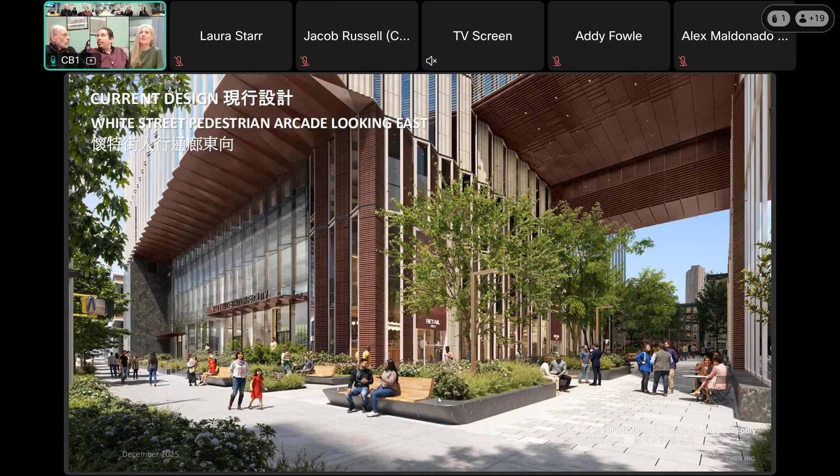DOT doesn't maintain any of this. No, they don't. So the point is well taken. Who is maintaining? DOC will ultimately be responsible for maintaining this. They may choose to partner with a local entity to assist with that, but that is a decision that will be made at a future time. But ultimately, it is a part of DOC.

And what about the gate? And the gates, so there are no plans to gate this off. The intent is that this is an open public passageway that will allow pedestrian access 24/7, and people can move through this space. But again, there are a lot of security measures being considered, and the design team is looking at this very thoroughly to do what they can from a design standpoint to discourage some of the uses that you're concerned about.

Great. I have one last comment about the solar studies that you have done. I do understand the massing, and it was given to you, but did you look at the shading on the lower-scale housing or fabric of the city that is towards Chinatown? And does it get impacted? I know you looked at the parks, but how about the smaller buildings?

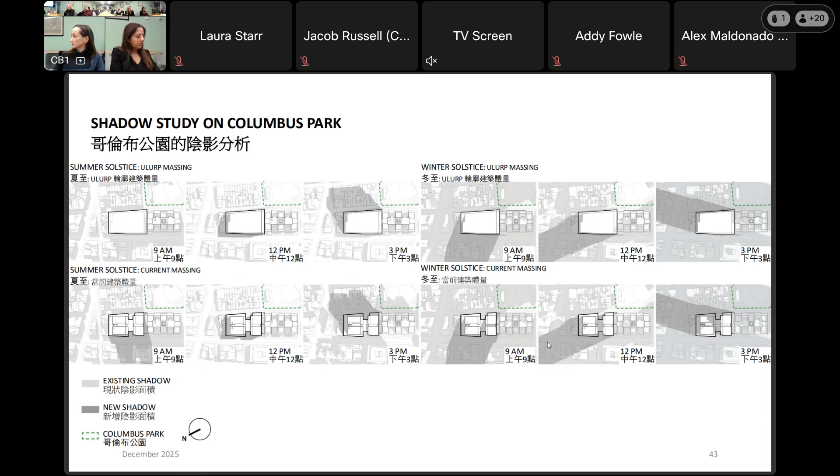Could I, that's one. Can you talk a little bit more about the privacy aspects in terms of visibility from and to the detainees in particular, and any other areas where they would be? Absolutely. So I think it's also important to understand the structure of the project itself. The ground floor, as you saw on the plan, is fairly public use. Levels 2 to 4 are building support, so staff administration, programming spaces, transportation spaces. Level 5 is health services. Level 6 onwards is where the typical housing units start.

Now that is where the building sets back. So in terms of the residents, which are mostly on the east side and the north side, the housing units start well above the existing buildings, so there are no direct connections in the first instance. Now, if you look at any of the typical cells, which are along the entire perimeter, as Jeff was discussing, it's a 12 square foot window, which is a residential-scaled window. Up till the first 6 feet from the floor, the window is frosted. So while daylight comes in and you get a sense of what's going on outside, you don't have a direct view. For people in custody inside, looking down is what is being prevented. And above 6 feet is clear, so their views are to the sky.